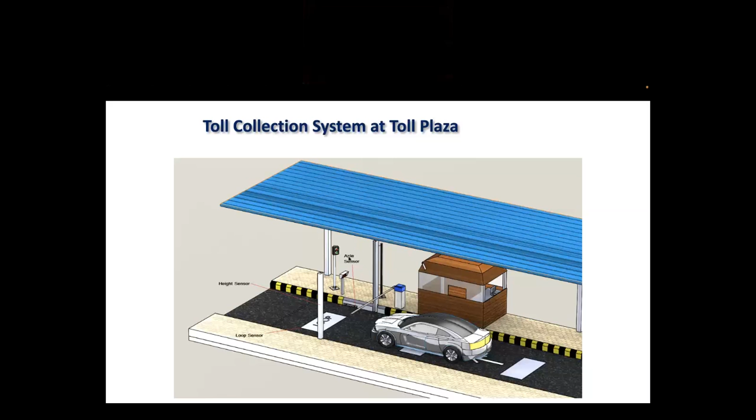As you know, if you see the timelines of how we started toll collection, it's almost 20 years back. We started with pre-printed tickets. Different denominations used to get printed in different colors, and the toll collectors used to give these tickets to the road users. Then we moved on to computer-based ticketing system from 2005 up to 2015, and some toll plazas continued with it. Slowly we migrated to smart card-based tolling. Then again in 2016, we started this pilot project of electronic toll collection. This is the chronology and timeline of toll collection, how we started with this.

If you see this, the main problem with pre-printed tickets and computer-based tickets was that it was very difficult to have that kind of audit mechanism, because individual toll plazas used to have their own accounting systems. And the head office, NHAI, being the managing agency, it was very difficult for NHAI to have that kind of accounting and monitoring at all the toll plazas. They were solely depending on the information given by individual toll operators or toll managers. So to have centralized control, we have to have some mechanism so that the complete transaction would hit one single server. Then only you'll be able to see the complete transaction across the country. This is how the evolution of electronic tolling has happened.

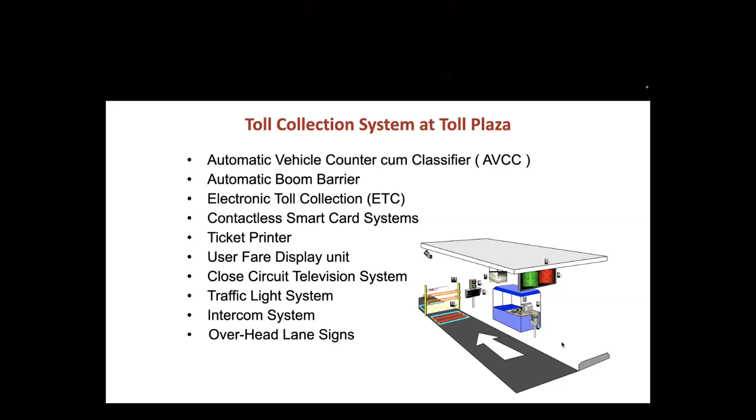So this is the typical AVCC system installed at toll plazas. We use this video profiler.

You can see the kind of images created using this light curtain profile. Two towers are installed on either side - one is a transmitter tower, the other is a receiver tower. The transmitter tower has LED lights which emit light, and the receiver side receives it. Any object coming in between cuts the beam and forms this kind of image.

With the help of these images, we can easily identify what kind of vehicle is passing through the toll lane, along with other parameters like the height of the vehicle and the axle gap. Based on these parameters, we can precisely identify the class of vehicle and match it with the toll collector's class. So the AVCC system will count and classify the vehicles.

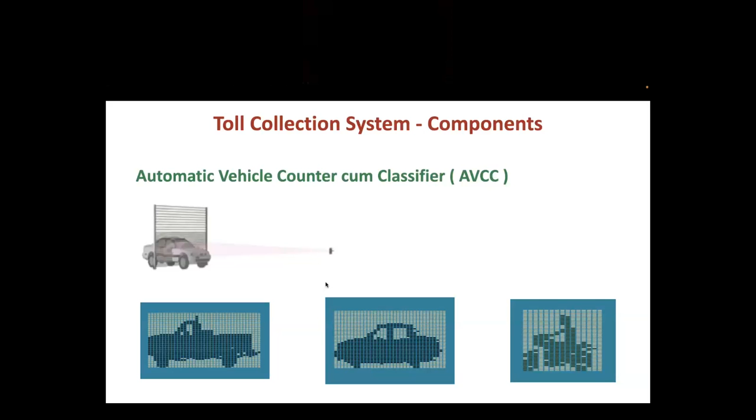This is the boom barrier. You can see a typical boom barrier here, connected with the toll plaza systems. Only after a successful financial transaction does that barrier automatically go up, allowing the vehicle to proceed further.

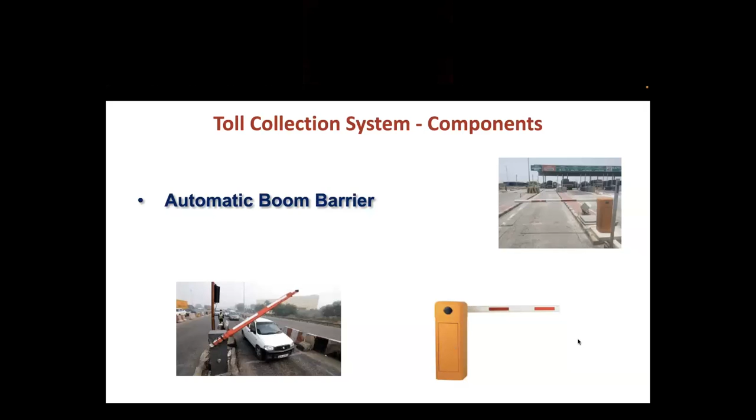This is the contactless smart card system. As I told you, a small chip-based smart card, similar to our credit card in size. It has a small chip embedded inside. When you tap it on a reader, that communication establishes without any physical contact. We call it tap and go, but even at a very close distance, communication establishes between the card and the reader.

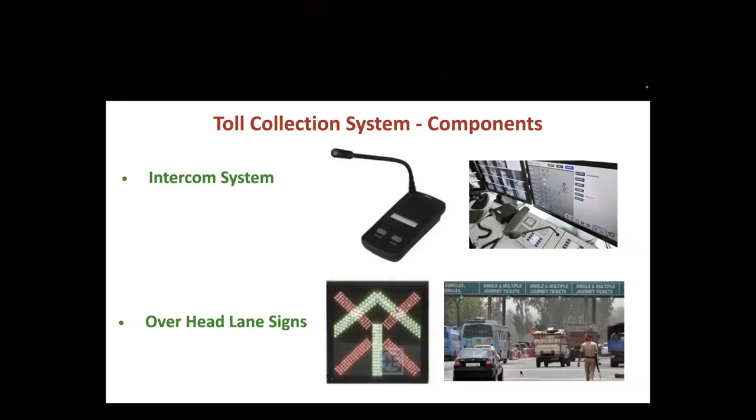CCTV systems, as I told you, there are three types of CCTV systems deployed at the toll plazas. The first one is inside the booth, just to cover the toll operator and face the window, so that the toll operator interacting with the drivers can easily be seen. In case of any incident, it can be captured and used as proof for further investigations.

The second one covers the front image of the vehicle. In some plazas they have two cameras, one to capture the front image, including the registration number plate, and the back image of the vehicle. In case of any vehicle dispute, this camera feed can be used to cross check. Many times we use this camera feed for police verification and tracking. Local authorities use NHAI's video feed for their investigation purposes, which helps them with video feed in individual lanes.

And the third one captures the entire view of the toll plaza, both the exit side and the entry side, so you can see the overall image of the plaza and how the traffic behaves during peak hours. We can easily see how congestion at the plazas happens. So that's the three types for booth operations: one to monitor booth operations, second for lane monitoring, and third to cover the complete plaza area.

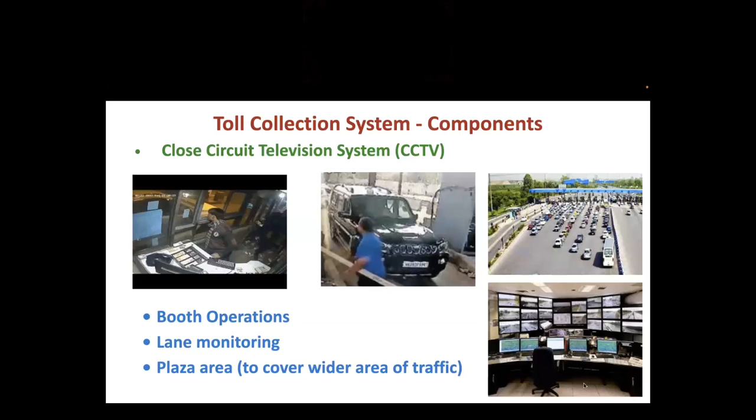Here now this toll plaza. Initially, when we started this tolling, we started with open tolling system. That means whenever a vehicle crosses the toll plaza, the road user has to pay the toll for the entire project or section of that toll plaza, irrespective of the distance traveled. Even if he travels 5 kilometers or 60 kilometers for the entire project, he has to pay the full toll just by crossing the toll plaza.

On the other side, closed toll plazas: closed tolling means the toll is collected based on the distance traveled. Nowadays, most toll plazas have closed tolling systems. In closed tolling, we have entry and exit plazas. You can see the image here. Whenever you enter at plaza 1, you can exit at point A or B or plaza 2, so depending on the point where you exit, your exit point is there. Based on the distance traveled, the amount is collected, and it's very easy with electronic toll collection systems. You have readers at entry and exit levels, so depending on entry and exit, it automatically calculates the toll and debits from your FASTag account.

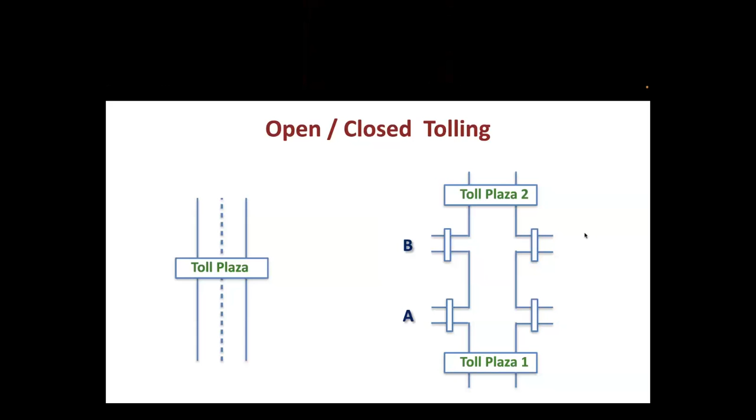Now we are coming to the electronic toll collection system. If you have any doubt, you can ask about whatever you have covered previously.

Electronic toll collection, as the name indicates, is collection of toll without any human intervention, and the toll is automatically calculated and collected. So you should have some kind of system or unit fixed inside the vehicle, and another system outside the vehicle, which we call the roadside unit, and the inside-vehicle one is the onboard unit. In this particular case, we have FASTag, a small adhesive sticker fitted on the windshield of a vehicle, and a reader is fixed either on a gantry or on a pole. So the communication happens between the reader and the RFID tag. How the transaction happens, all that flow I will cover in subsequent slides.

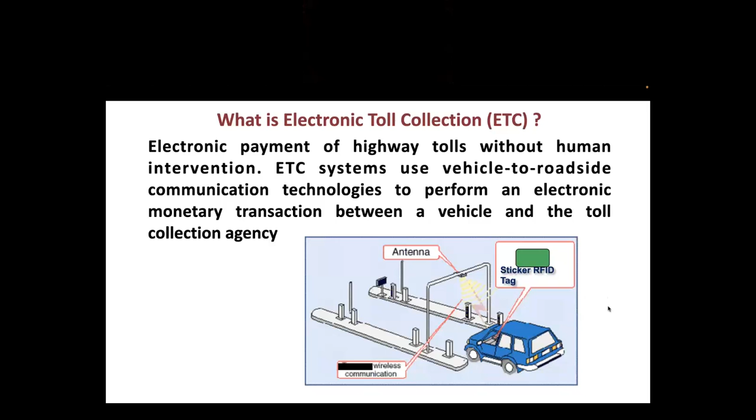For ETC technologies, when we started this in 2015-16, there were different technologies available across the globe, so we had to select one suitable technology for Indian conditions. These are the major four technologies available. One is dedicated short range communication, under which there are two types of systems: 5.8 gigahertz microwave passive, which most European countries were using, and 5.8 gigahertz microwave active, used in Japan and Singapore. Then radio frequency identification, used in USA, Mexico, Chile, Argentina, Dubai, Taiwan and some other countries.

Another important technology, a very state-of-the-art high-tech one at that time, was GPS based. In India we also tried a pilot project on this, and the government has recently announced that India is considering implementing this GPS-based system. I will discuss this part in detail in the next slides. The fourth one is automatic number plate reader system, also another type of ETC system. In London it's used very widely for congestion pricing. In India also we tried one project, the Delhi Meerut Expressway, where we successfully implemented this, and it is still under operation now. I'll give detail of ANPR-based tolling in India and the Delhi Meerut Expressway in one particular slide.

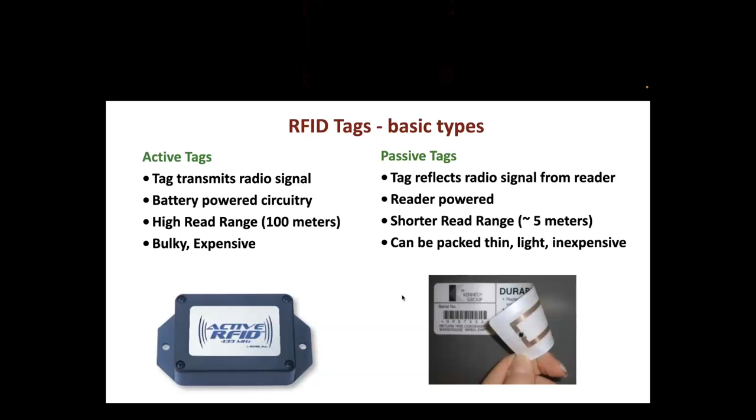Now, we have been talking about FASTag and RFID tag. The difference is RFID is a technology, and FASTag is a brand image of the toll ETC system in India.

In fact, it was started, initiated by NHAI. NHAI created a company, Indian Highways Management Company Limited, in the year 2013. I was part of IHMCL since the beginning, so we created all the systems and policies for ETC there.

FASTag was made mandatory for all new vehicles from December 2017. All new vehicles getting registered should have FASTag fitted mandatorily.

Then, for tolling purposes, it was made mandatory from 16th February 2021, that all tolling on NH highways, national highways, has to be through FASTag only. If you don't have FASTag, then a penalty of double the amount has to be paid.

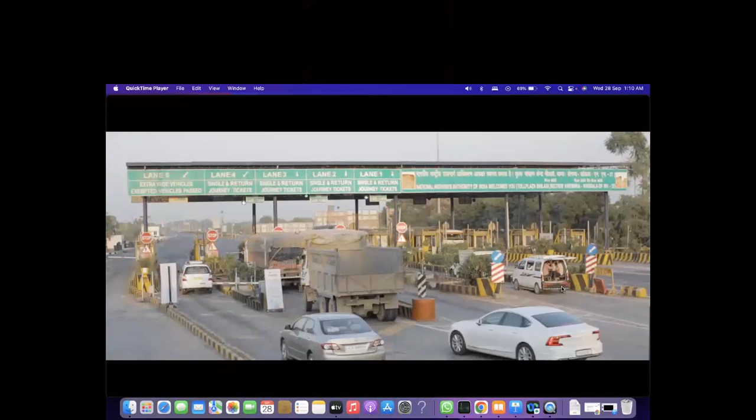The NETC program offers significant benefits to all its stakeholders. For road users: a cashless toll payment option, 5% cashback by NHAI on all FASTag-enabled transactions during FY 2018-19, SMS alerts for all toll transactions, less congestion, reduced commute time and savings on fuel, and easy access to toll statements online through app or web. For government: reduction of emissions due to reduced stops at toll plazas on the highway, and enhanced transparency of toll transactions.

NHAI has taken various initiatives to promote the NETC program, which has led to increased penetration of FASTag in the Indian highways network. Today, over 22 banks are working as FASTag issuers, and about 8 banks are working as FASTag acquirers at toll plazas. The number of FASTag users has crossed 3.5 million, and the penetration of electronic toll collection stands at around 30% at over 450 plus toll plazas under the NETC.

To further boost the sales of FASTag among the commercial vehicle category, NHAI has proposed to mandate affixation of FASTag.

FASTag by NHAI is an extremely powerful and beneficial tool, and its usage has already started changing the daily lives of commuters as well as toll plaza operators. The increased usage of FASTag will definitely support the government's initiative aimed at developing and digitizing India. It is time to take a smart step today to build a brighter future tomorrow.

That video was about the Indian Roadways Network, spanning over 5.5 million kilometers.

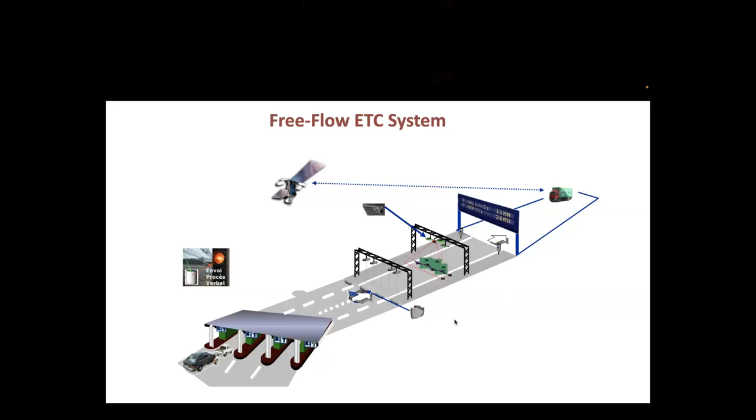At present, we have one study happening on the Delhi Meerut Expressway based on ANPR systems, where we have free flow tolling. Another technology under consideration is GPS based, but it's a bit complicated, requiring detailed study and an enforcement mechanism, so the government is working on that. Until then, we continue with the same toll plaza systems and ANPR based tolling.

So here, this is the Delhi Meerut Expressway project I was referring to, approximately a 60-kilometer stretch from Delhi to Meerut, with many entry and exit points. Whenever a vehicle enters the expressway, camera systems automatically capture the registration number plate and convert that number plate image to characters using OCR, optical character recognition technology.

It matches and compares that number with the database. Once the number is captured, it checks in the backend with the Vahan database, gets the details, and the money transfer happens with the help of the existing FASTag.

We already have the FASTag program running in other projects, and all FASTags are connected with bank accounts or wallets through which remittance or debit/credit happens. In the Meerut Expressway case, only identification of the vehicle happens with ANPR, whereas the money transaction happens using FASTag.

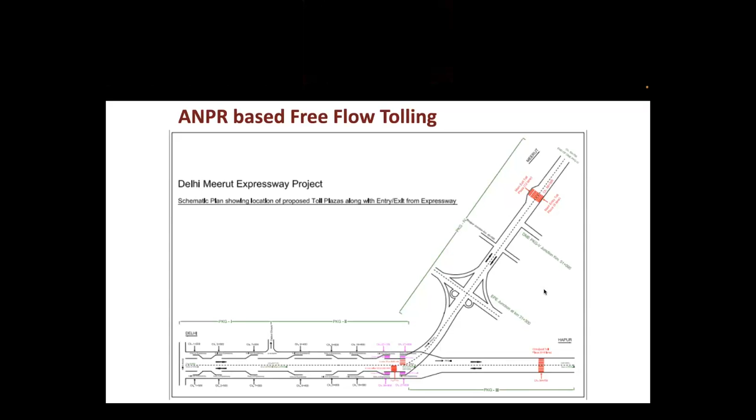And it's been working successfully for the last 6 months, I guess. This is the image of the Delhi Meerut Expressway, where we have an ANPR plus FASTag based toll collection system. We call it the free flow, multi-lane free flow system, and it is operating quite successfully now.

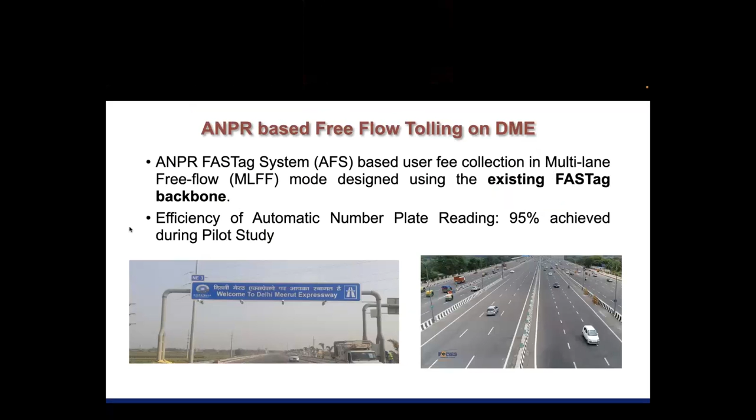Okay, now here's additional information regarding this IHMCL. This was created by NHAI mainly for implementing electronic toll collection in India. Presently we have nearly 12 acquiring banks and 33 issuer banks.

But even though 33 banks are certified for issuing FASTags, only 5 to 6 banks are actually active. The remaining banks are not that active.

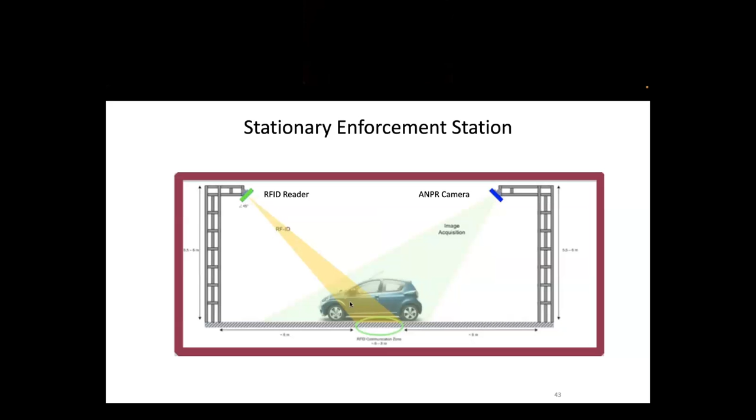This is how it can be done. On a gantry, the number is read there, and RFID using FASTag, we can see that unique number of the vehicle, and that can be checked with different applications. The backend, whether it's tax, insurance, pollution, and if it's not meeting any conditions there, then even a challan can be generated, and that can be sent to the driver or owner using different modes, either through his mobile or email, or a physical challan can also be sent.

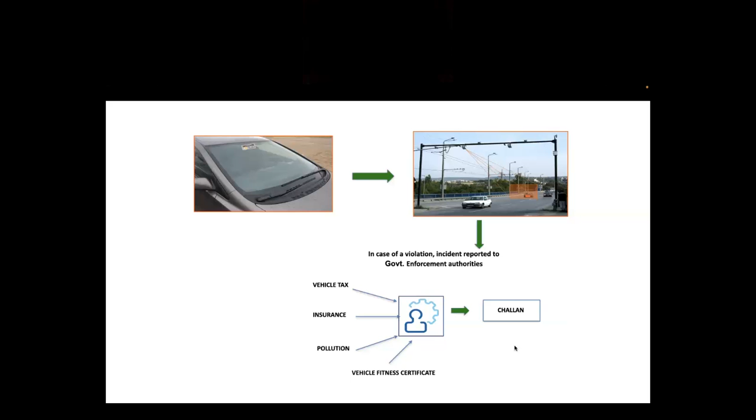So this is that flow, how if it is not meeting any of the conditions of that government approved things, then the challan can be sent to the owners through these modes: email, mobile, or by post courier. And once payment is done, again that record is updated and that is set right.

So those are the FASTag based applications. Now we are moving to congestion pricing. As that name indicates, congestion pricing is generally done at some location in the urban area.

Previously, we have seen toll collection is only for highway sections, and for parking, there's one very closed area. Whereas some sections of urban spots, they are collecting extra fees for using that facility at some given point of time. So this is very similar to toll collection only, and just to control the demand, because if you don't have this kind of congestion charging mechanism at peak hours, that could be unmanageable at some locations.

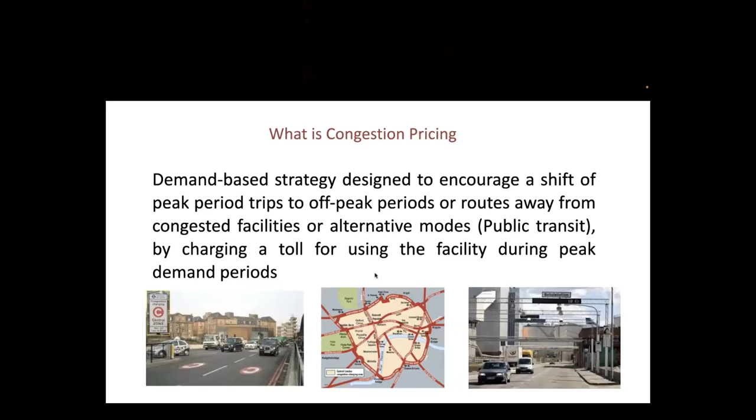It is a demand-based strategy designed to discourage peak period traffic to any area in urban areas. So this one is time based. We can see the peak traffic. The user who wants to use that particular facility during that particular time has to pay some extra fees for using that road or facility during that time.

Toll is levied at single or multiple points at a facility, depending on the location, and it's also zone based. So whenever somebody enters that zone, he has to pay something extra. Alternatively, if he wants to avoid this kind of extra charges, he can defer his travel to another time, take an alternative route, or opt for public transport instead of his own vehicle. He can take buses, metro, trams, or subways, so that this peak traffic can be avoided and charging extra can also be avoided.

The congestion pricing increases with congestion levels. That is automatically tuned in such a way that if the traffic increases, that amount also goes up.